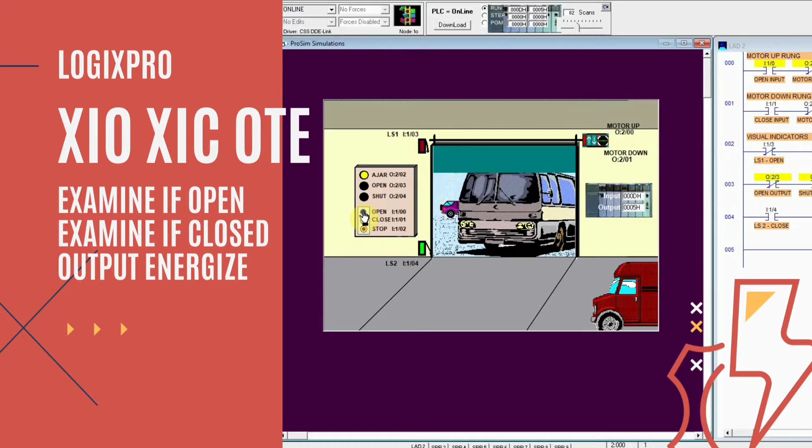Before anything else, there are a few things to take note of. You should always click Download and then Run on the upper topmost option. You need to do this every time you change and run the PLC ladder diagram.

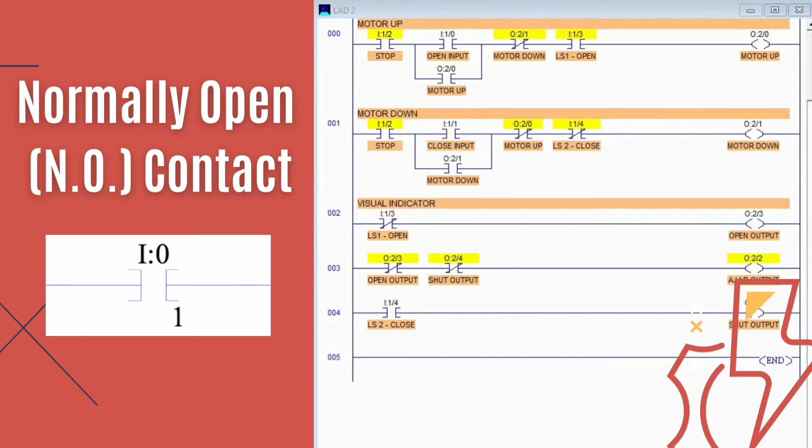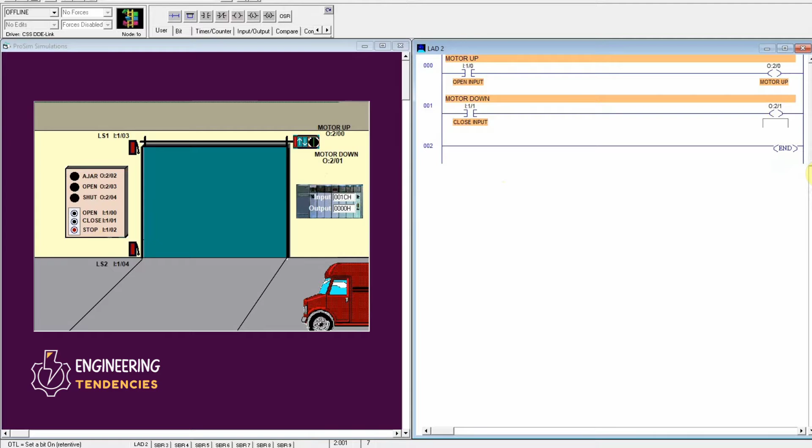We want to apply our knowledge of relay logic instructions to design a program which will control the LogixPro Door Simulation using the Examine if Open, Examine if Closed, and Output Energize instructions. The door system includes a reversible motor, a pair of limit switches, and an operator control panel, all connected to your PLC program.

In this exercise, the open and close push buttons will be used to control the movement of the door. The movement will not be maintained when either switch is released, and therefore, the stop switch is neither required nor used in this exercise.

We need to put the normally closed contact of open output and shut output in the rung for the ajar output. It ensures that the ajar output will illuminate when the door is slightly opened, and de-energize it when the door is fully open or fully closed.

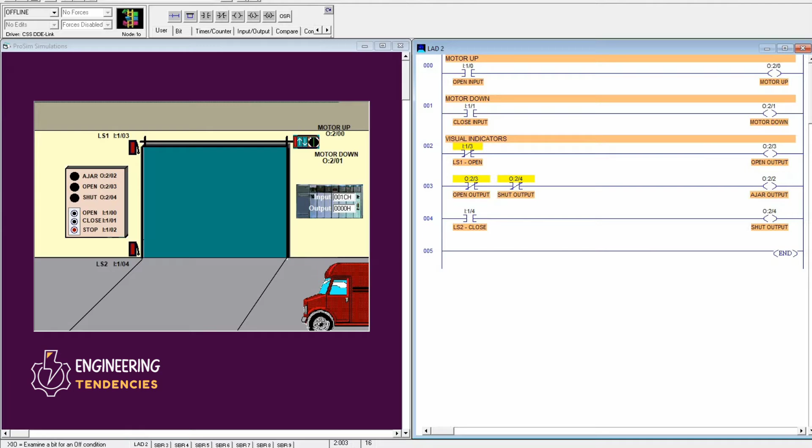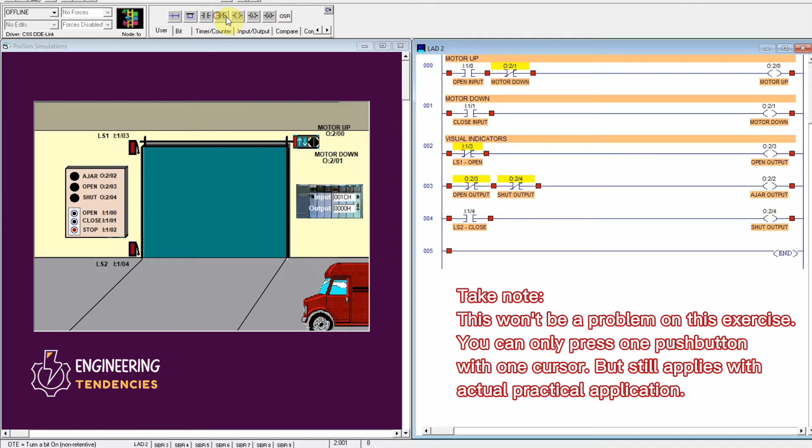Another thing to keep in mind: avoid, in any circumstances, that both motor windings be energized at the same time, especially in actual practical application, because it will result in motor burnout. If done responsibly, you can possibly extend the operating life of the motor.

Be sure to put a normally closed contact of motor up output in rung 1, and another normally closed contact of motor down output in rung 0. This is to cut off the current in the intended rung when the other output contact is energized.

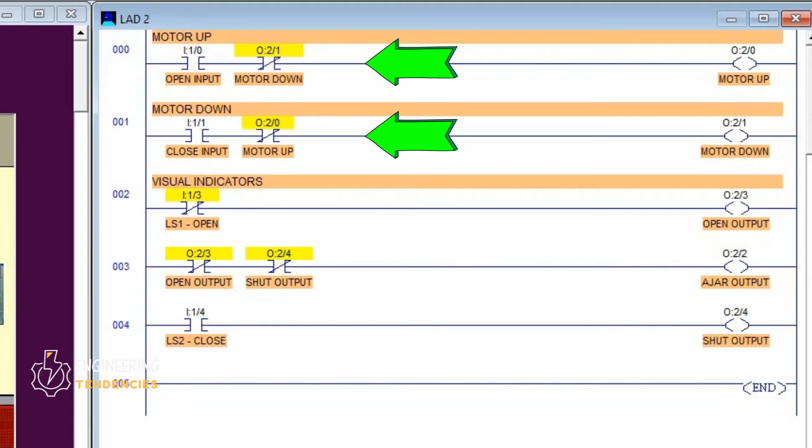Also, make sure to stop the energized state of the motor when the door is already fully open or already fully closed. This can strain the motor and might result in another case of motor burnout and door damage.

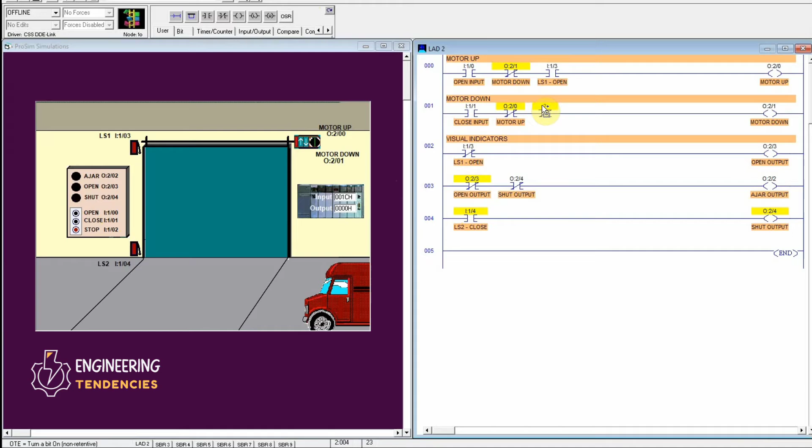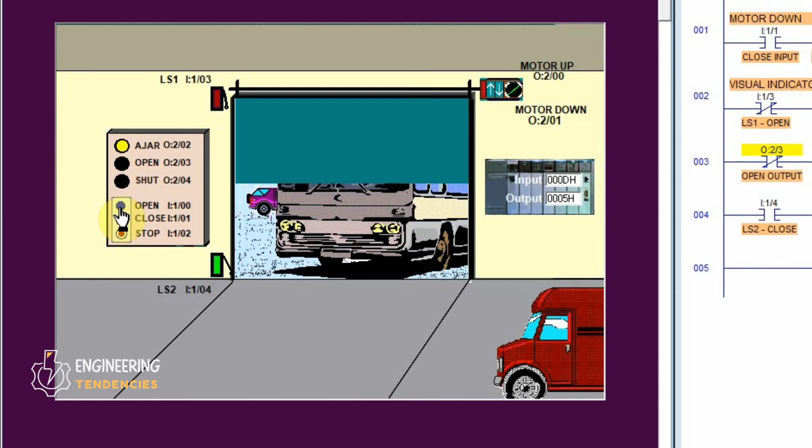To eliminate this problem, put a normally open contact of limit switch LS1 in rung 0 and a normally closed contact of limit switch LS2 in rung 1 to cut off the current flow in the intended rung. With that out of the way, let's get the simulation running.

We have visual indicators on the side, usually in the form of LEDs, used for monitoring the condition of the inputs and outputs in the PLC program. The shut lamp will be illuminated if the door is in the fully closed position.

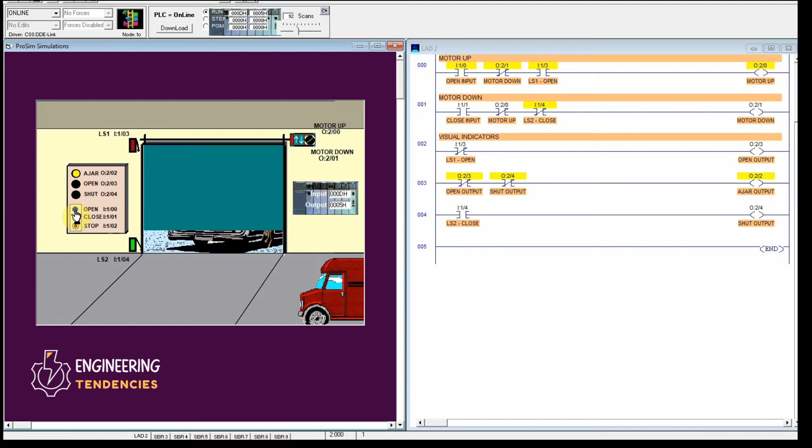Pressing the open switch will cause the door to move upwards, opening it up, if not already fully open. The opening operation will continue as long as the switch is held down. If the switch is released, or if limit switch LS1 opens, the door movement will halt immediately.

The ajar lamp will be illuminated if the door is not in either the fully closed or fully opened position, or slightly opened. In simpler terms, it will light up when the door is in the middle of opening or closing. After the limit switch LS1 opens, the open lamp will be illuminated because the door is now in the fully open position.

Take note. If the door is already fully opened, pressing the open switch will not energize the motor, to avoid the possibility of motor burnout and door damage.

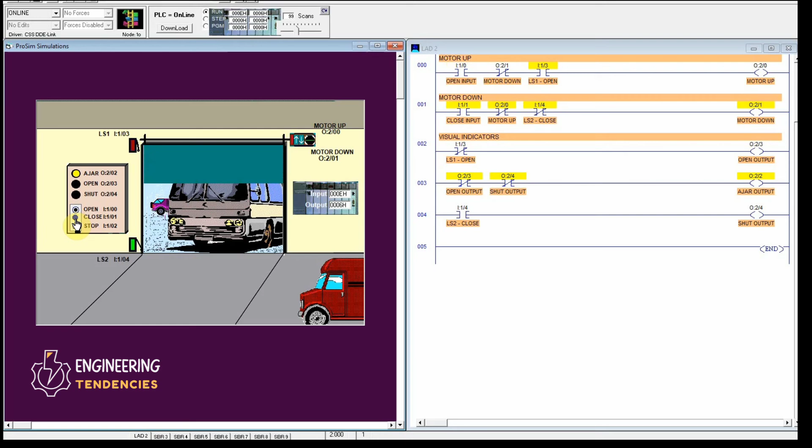Pressing the close switch will cause the door to move down, closing it, if not already fully closed. The closing operation will continue as long as the switch is held down. If the switch is released, or if limit switch LS2 closes, the door movement will halt immediately.

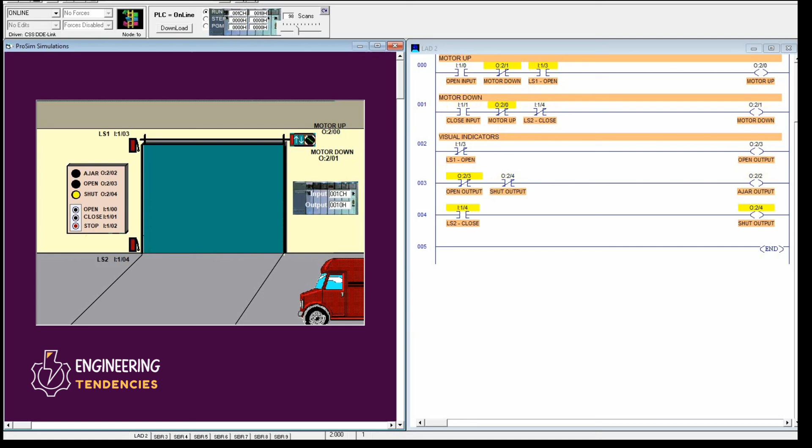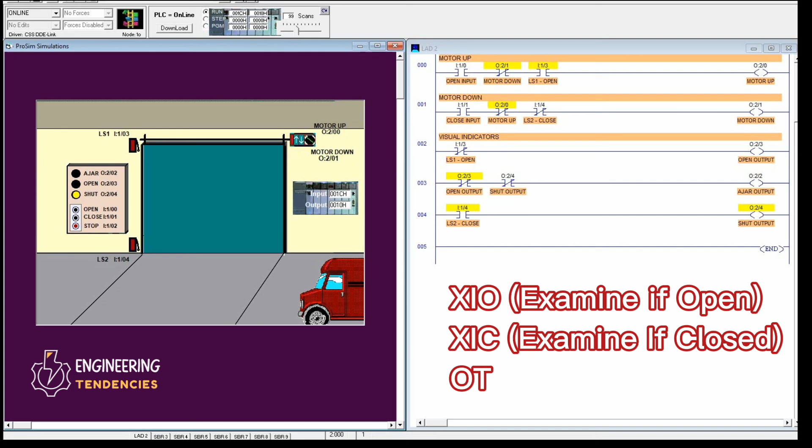If the door is already fully closed, pressing the close switch will not energize the motor, to avoid the possibility of motor burnout and door damage. And that's one of the ways you can design a program which will control the LogixPro Door Simulation using the Examine if Open, Examine if Closed, and Output Energize instructions.